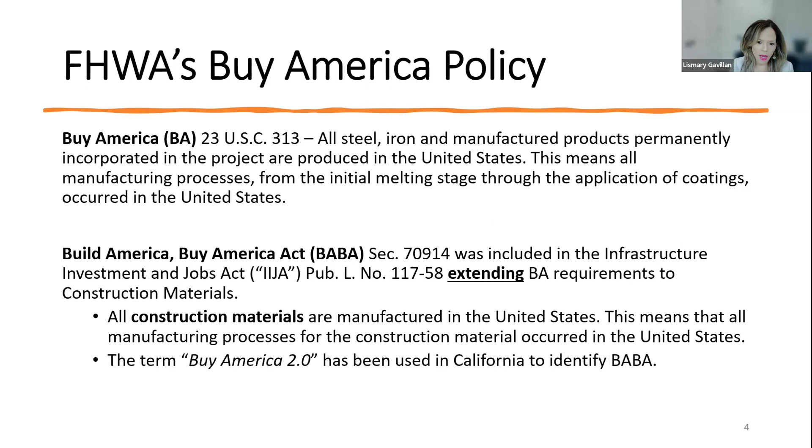Our Buy America policy applies to two types of projects. The first is any project that is federally funded, or any phase of that project that is federally funded. The second is a non-federal aid funded project if the non-federal aid contract is included within the scope of the NEPA document, and at least one of the other contracts within the scope of that same NEPA document, your environmental document, is funded or will be funded with federal aid funds. This includes any contracts eligible for federal aid assistance, including environmental, design, right-of-way, construction, or any other contract under that environmental document.

Now, these Buy America requirements on non-federally funded projects were implemented under MAP-21 back in 2012. So this is something that has been out there for a little while now, but it's always good to remember that this type of project, if these characteristics are met, is also subject to Buy America requirements.

So in summary, our current Buy America policy applies to steel, iron, and manufactured products with content of steel and iron higher than 90% by weight. You can find additional information about manufactured products in our general applicability waiver on manufactured products, issued in 1983, and also Caltrans Deputy Directive 119 for additional information on manufactured products.

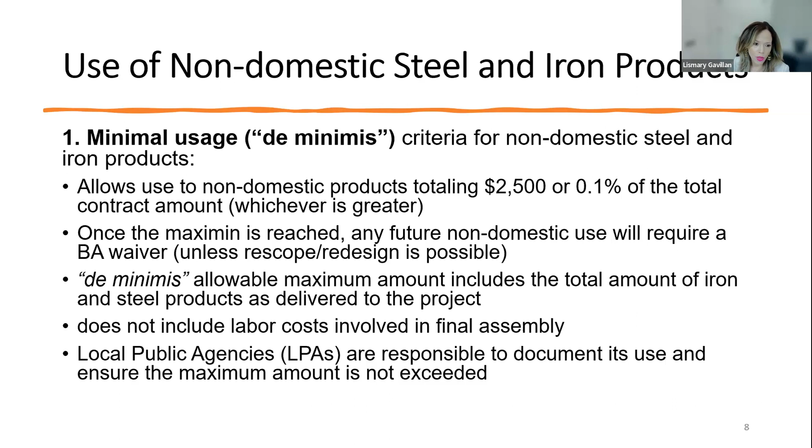For the minimal usage option, this allows for the use of non-domestic products totaling the greater of $2,500 or 0.1% of the total contract amount. Once this minimal usage is reached, any future non-domestic use will require a Buy America waiver, if rescoping or redesign cannot be achieved. The agency, the LPAs, are responsible to document the minimal use numbers and quantities and ensure that the maximum is not exceeded at any point during the contract.

Under option number 2, alternate bids provision, agencies have the option to include alternate bids for domestic and non-domestic steel and iron materials. This means the agency will develop two sets of plans, specifications, and estimate packages for the domestic and non-domestic project. This occurs during the design and advertisement phases, which we have to keep in mind, because sometimes people think we can use this once the project is already under construction.

Well, unfortunately, that's not the case, because for this option, the contract provisions when bidding the project must include and require that all bidders submit a bid based on furnishing domestic steel and iron materials. They also have to clearly state that the contract will be awarded to the bidder who submits the lowest total bid based on providing domestic steel and iron materials.

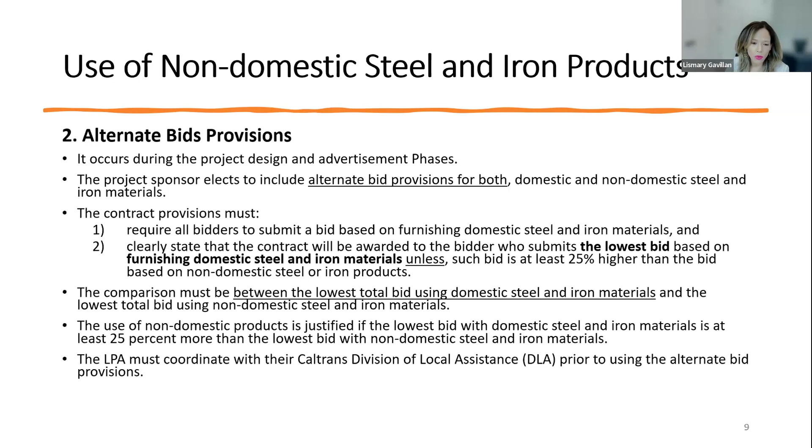That's unless such domestic total bid is at least 25% higher than the total bid based on non-domestic steel or iron products. When bidders submit their bids, they have to submit a bid based on domestic products, with the option to submit one based on the non-domestic bid. As the process determines, this provision can only be used during the project design, advertisement, and bid phase.

Now, the last option to incorporate non-domestic products is obtaining a Buy America waiver. This currently applies to steel, iron, and construction materials, as I mentioned a few slides back. This process is based on public interest, and whether there is sufficient supply of domestic materials of satisfactory quality. This is a very lengthy process, which requires years to process, and there is no certainty that at the end of the waiver review process it will be approved. We seldom, very rarely, approve Buy America waivers. That's very important to keep in mind.

Now, these waivers, any Buy America waivers, must be approved prior to the advertisement of bids. And if a Buy America waiver need is discovered during construction, then the waiver must be approved prior to incorporating the material into the project.

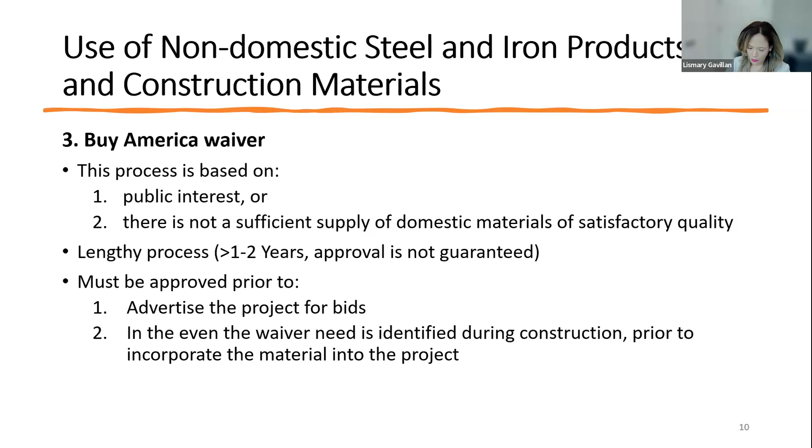Now, at the division level, we are responsible for the review of the waiver request for completeness. Once the package is ready, we would recommend it to our headquarters Office of Infrastructure for further review, and they will continue the coordination internally. We also work with Caltrans Division of Local Assistance to coordinate any additional information that may be required for the agency to complete the package, or any follow-ups from our offices in headquarters or the Made in America office.

Now, as you may have heard, there have been changes in our Buy America policy, and they were triggered by the Build America, Buy America Act, and that's what we're going to be discussing now. So how did we get here? How was this incorporated into our policy? Well, in January 2021, President Biden signed Executive Order 14005 on ensuring the future is made in all of America by all of America's workers, where it required federal agencies to maximize the use of domestic goods, materials, and products.

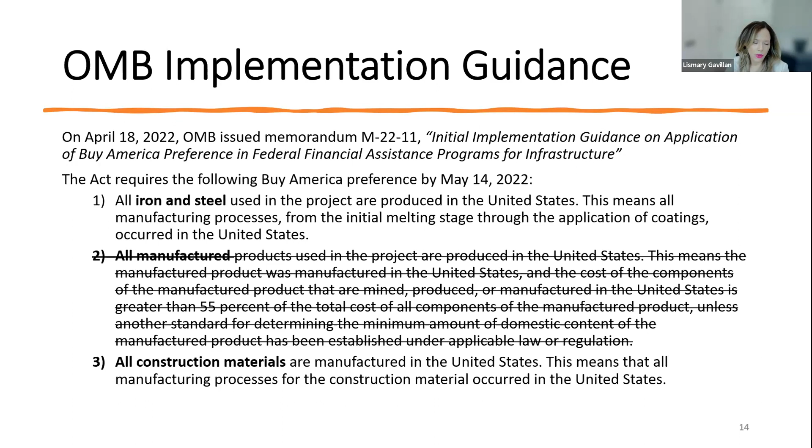So all our current policies on steel and iron remain valid. Nothing changed in that regard. Our manufactured product requirements will not change based on this memo, meaning that our 1983 manufactured product waiver is still valid, and I'm going to be discussing its review later on in the presentation. And again, the only impact will be adding construction materials to those materials subject to Buy America.

Now, the OMB memo is applicable to Federal Highways since IIJA defined infrastructure as roads, highway, bridges, public transportation, utilities, broadband infrastructure. And IIJA also stated that structures, facilities, and equipment that generate, transport, and distribute energy, including those for electric vehicle charging, should be treated as infrastructure. So that's the reason why this is applicable to our federal aid projects.

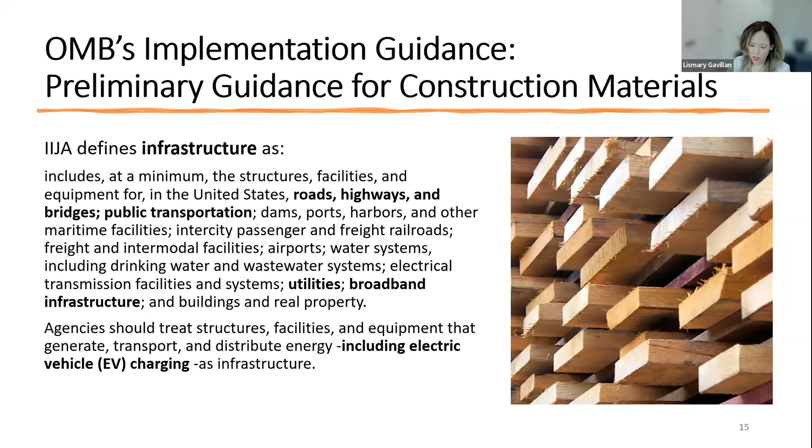Now, that same memo listed the construction materials subject to Buy America requirements as an article, material, or supply that is or consists primarily of non-ferrous metals, plastic and polymer-based products, glass, lumber, or drywall. I have to note that these are the only items listed here as construction materials. Items such as iron or steel, manufactured products, cement, cementitious materials, aggregates such as stone, sand, gravel, aggregate binding agents or additive are not considered construction materials. So we're just talking about this listing of 5 items here.

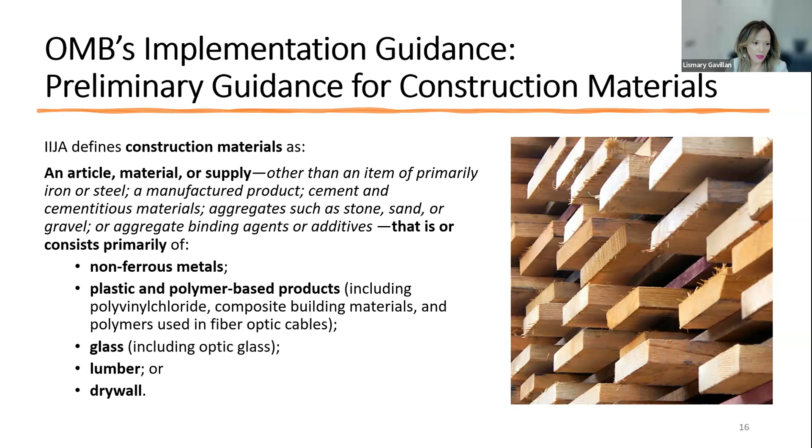Now, to facilitate the categorization of articles, materials, or supplies, OMB determined that such materials should only fall in one category: steel or iron, manufactured products, or a construction material. So to clarify, the memo states that items that consist of 2 or more of those listed materials combined through a manufacturing process are considered a manufactured product. And items that include one of the listed construction materials combined with another material not listed is also considered a manufactured product.

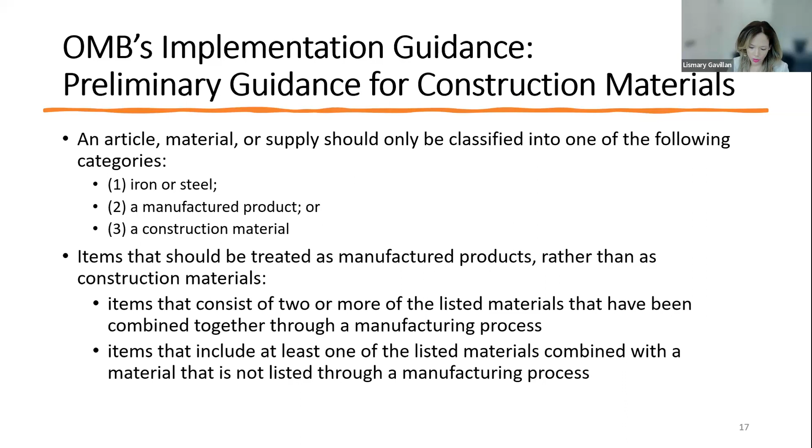Now, we're still waiting on final standards and definition for all manufacturing processes for those listed construction materials. So in the meantime, the OMB memo suggested agencies consider all manufacturing processes for construction materials to include at least the final manufacturing process and the immediately preceding manufacturing stage for the construction material.

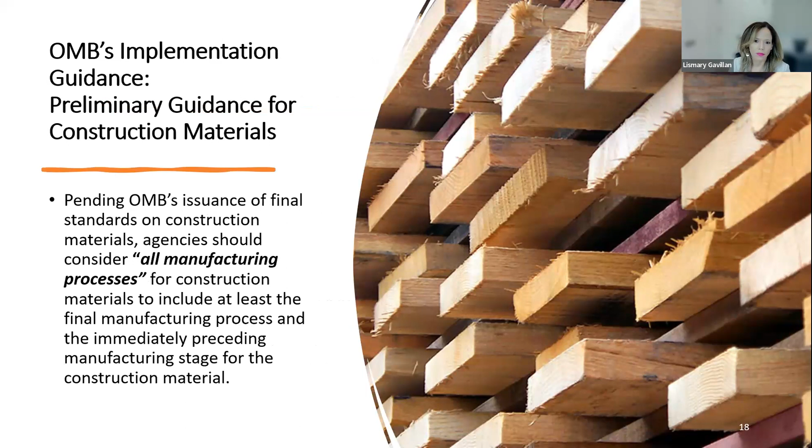The first one was a temporary Buy America waiver for construction materials. This was effective on May 14th, 2022, and it expired on November 10, 2022.

The second one is a waiver on Buy America requirements on construction materials for certain contracts and solicitations. This one was issued on January 30th, 2023, so it's a recent waiver.

The third one is a waiver of Buy America requirement for electric vehicle chargers, issued on February 21, 2023.

And the last one is a notice of proposed waiver of Buy America requirements for de minimis cost, small grants, and minor components. This one has not been issued, is still under review.

So the first waiver that I mentioned was issued in May 2022. This was a temporary Buy America waiver on construction materials. It was made effective on May 14th, 2022, as I mentioned. This waiver had a duration of 180 days, and it expired on November 10th, 2022, since it was not extended.

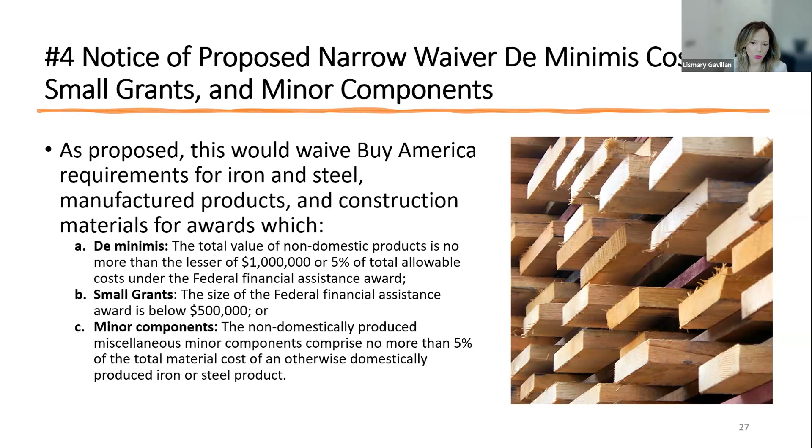We also have the raw materials waiver, ferry boats, and concrete pole waivers. All of these are older than 5 or 6 years now, so all need to be reviewed. Our headquarters is prioritizing the most popular waivers for federal highways, which are the manufactured products and raw materials waivers. The other two, ferry boats and concrete pole, won't affect our federal aid program, so we don't have to worry about those for now.

So now we continue implementing all the general applicability waivers. Our manufactured products waiver from 1983 is still valid. Our raw materials waiver is still valid. We'll have to wait until the review period is finalized and then made effective. Any changes made effective, that's when we'll look into what the changes are.

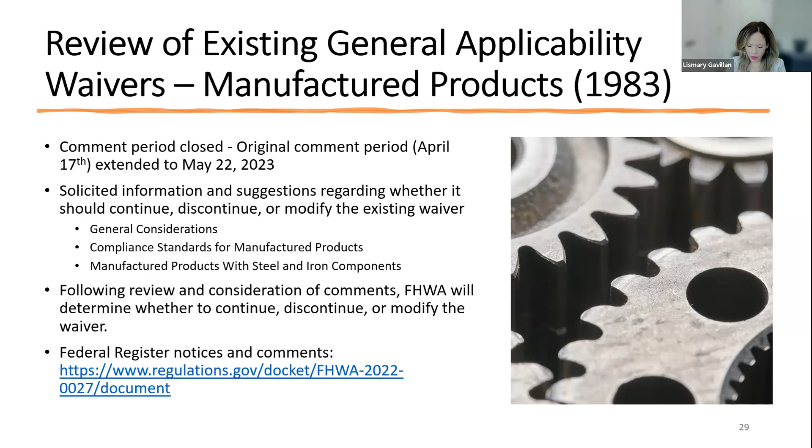In addition to the waivers effort, there is a proposed rulemaking for guidance for grants and agreements. OMB, the Office of Management and Budget, is proposing a new Part 184 in 2 CFR, Code of Federal Regulations, Chapter 1, to support implementation of the Act and clarify the requirements within 2 CFR 200. These proposed revisions are intended to improve uniformity and consistency in the implementation of BABA requirements across the government. The comment period closed on March 13, 2023, and is currently under review by OMB.

Moving forward, USDOT will issue a final determination on the proposed de minimis waiver I just mentioned. Please note again that any proposed waiver is not final until issued and made effective. We also continue the review of the general applicability waiver on manufactured products, which is ongoing, and we expect the raw materials waiver to be the next one put into the review process. We're still waiting on OMB's issuance of final guidance for construction materials, but in the meantime we do have preliminary guidance we can use to implement BABA. At the division level, we continue to provide technical assistance to Caltrans and local agencies as it relates to Buy America.

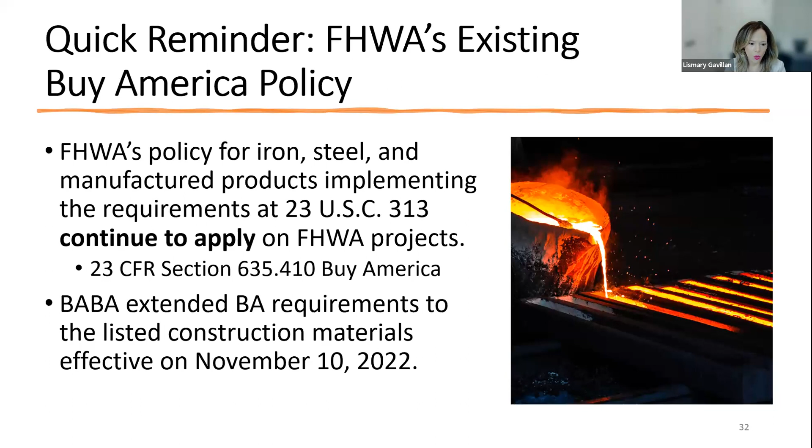Number two: do federal highways existing Buy America requirements for steel, iron items, and manufactured products continue to apply? Yes. BABA just extended the application of Buy America requirements to a new category of products, construction materials, those that we listed earlier in the presentation.

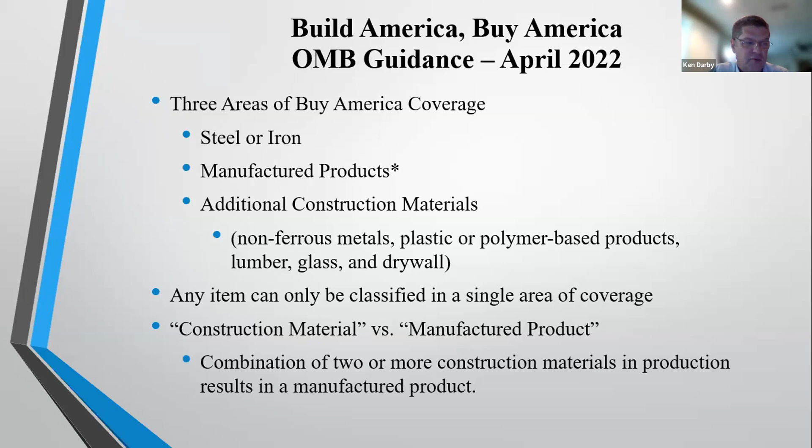Then these temporary elements that are not incorporated into the permanent work, we talked about formwork or false work. Again, as long as it's not incorporated into the permanent work. Another example might be a temporary culvert that's used on the project and then later removed.

Existing items that are relocated from one location to another on the project, so a manhole, for instance, or maybe another culvert. So as long as you're just taking that material and relocating it, it's not subject to Buy America. Now, if you get out there and you find that it's reached the end of its service life and needs to be replaced, then it is going to be subject to Buy America coverage.

This next one is really for the additional construction materials only. The raw materials, surface treatments, and coatings have not been well defined like we have well-defined requirements for steel and iron in this regard. So for now, at least, until we get more distinct information from OMB and other federal agencies and departments, we're not requiring that those raw materials, surface treatments, and coatings be subject to Buy America.

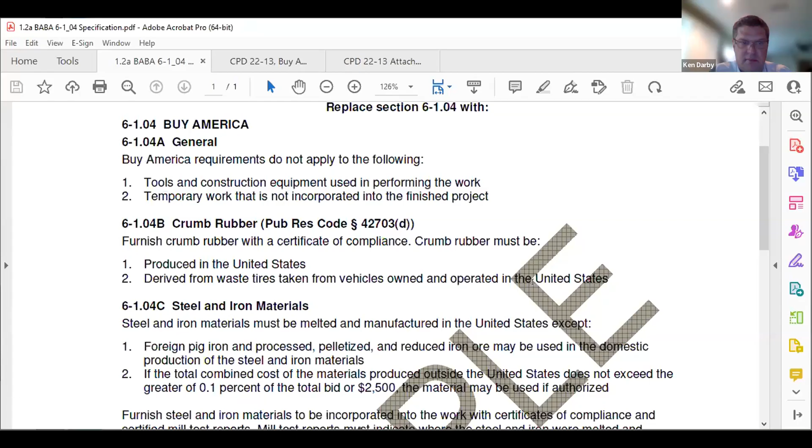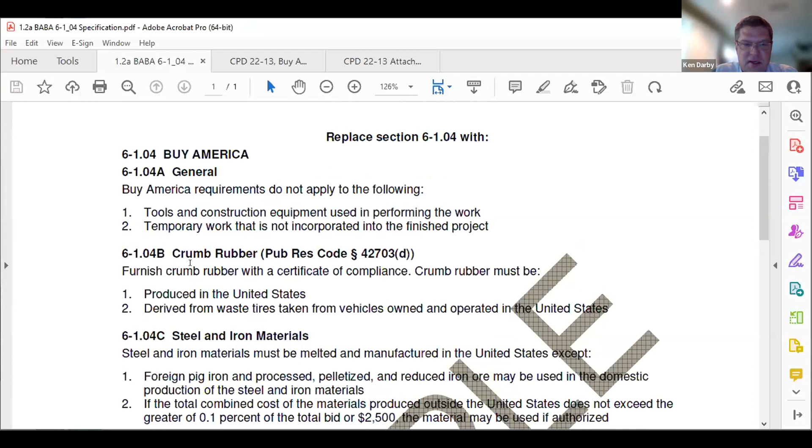Okay, so this is going to look very familiar to what we've discussed already. The general section is really identifying those exclusions, the tools and construction equipment, the temporary work. The next section here is the crumb rubber, which is a state mandated Buy America requirement, and that's really specific to Caltrans.

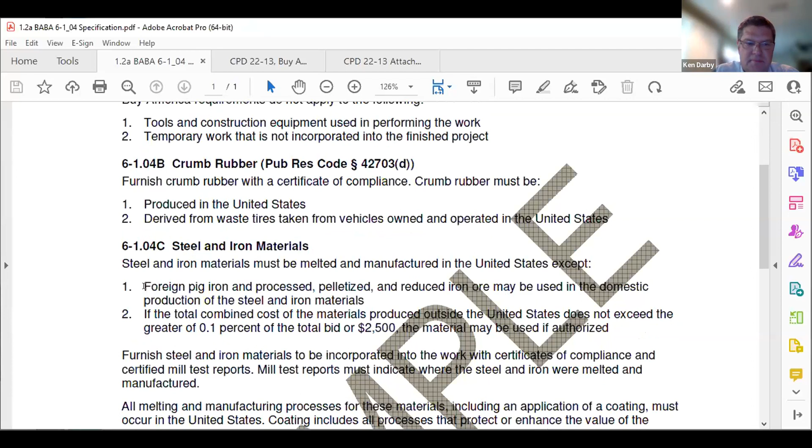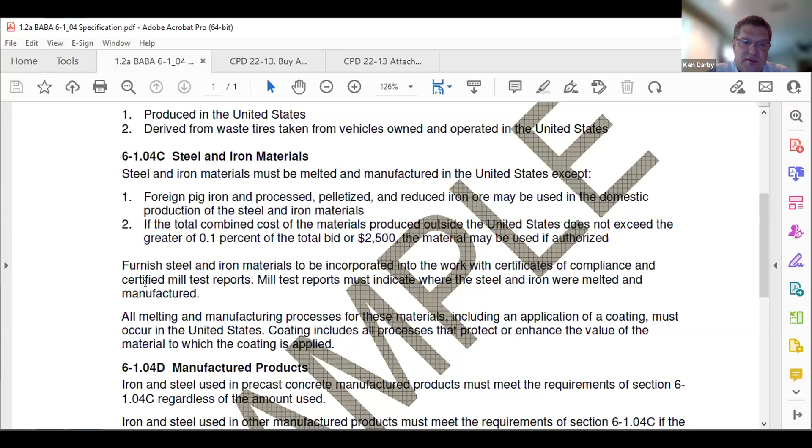Then we have the steel and iron material requirement, which is essentially unchanged. We still have the allowance for the non-domestic raw iron and steel materials. And then we also have the minimum use allowance, which is the greater of 0.1% or $2,500. And again, that is only for steel and iron materials. We don't have a similar minimum use allowance for the additional construction materials that we'll see later.

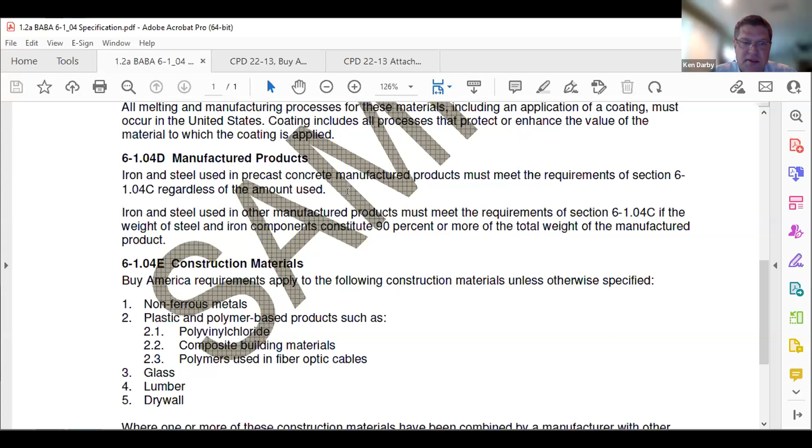The manufactured product section—again, we're only concerned with those manufactured products containing steel and iron. This is directly in line with what we have in Deputy Directive 119. So for precast concrete manufactured products, if there's any steel or iron in them, they are subject to Buy America, the steel and iron. Otherwise, we have this 90% by weight of the manufactured product—if your steel or iron comprises 90% or more by weight of the total manufactured product, then that steel and iron aspect is subject to Buy America.

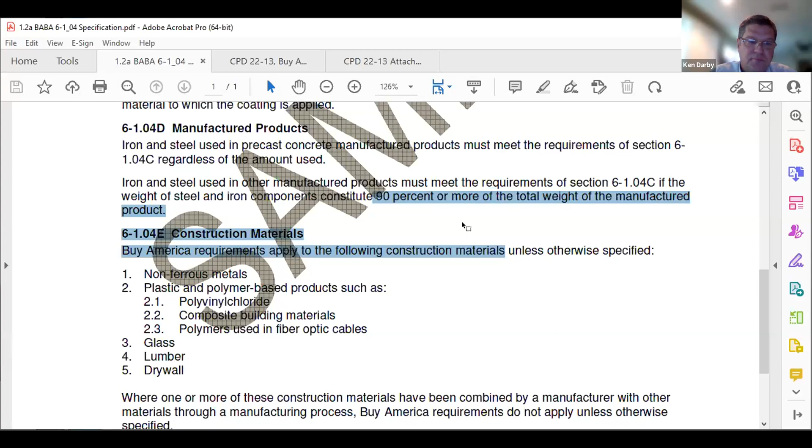Okay, then the spec goes into construction materials. It identifies the non-ferrous metals, the plastic and polymer-based products, glass, lumber, and drywall. It also discusses where, if you combine one or more of these materials in the manufacturing process with another construction material, it's not subject to Buy America unless otherwise specified. The otherwise specified is, if you combine it with the steel or iron, you're going to fall back into that case above potentially.

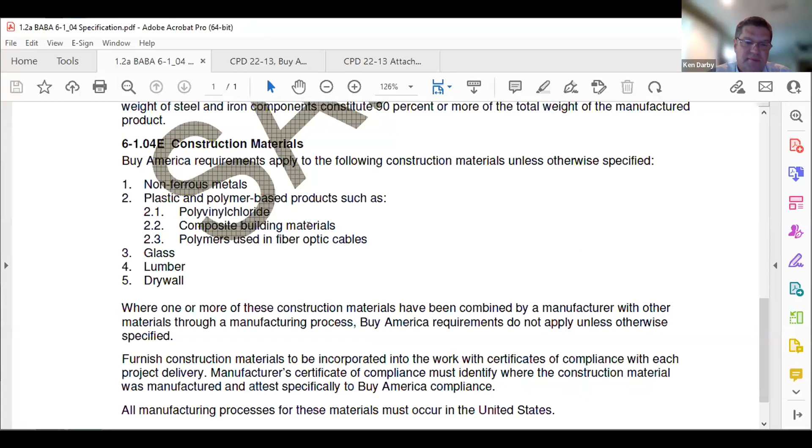The other important aspect I want to stress here is what we're doing initially as far as validating Buy America for these additional construction materials is requiring the certificate of compliance from the manufacturer or producer. Those need to be provided with each delivery of these types of materials to the project. It's important to note that we only accept those from the manufacturer or producer—we don't accept those from a contractor or a supplier. So this is really kind of a big change for our contractors out there.

Okay, now I'm going to go to, let's see if I can just—I'm going back to the PowerPoint real quickly.

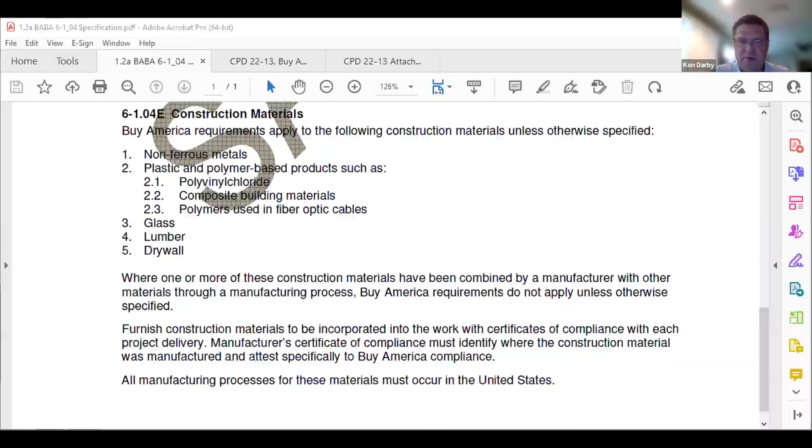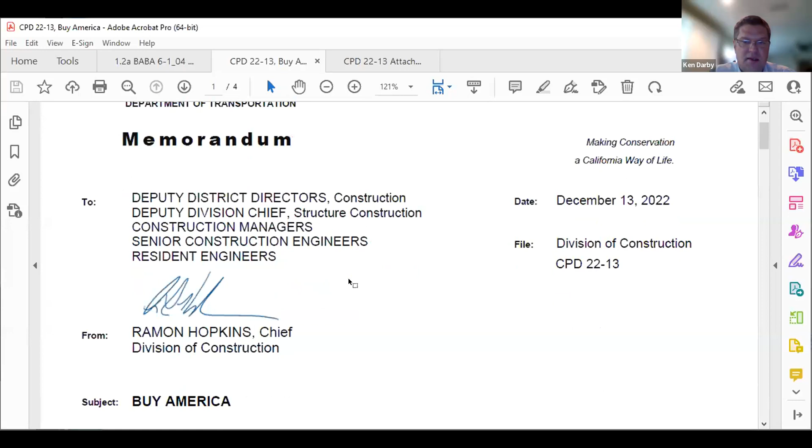This came out in December 2022, and it's got a lot of the same information we've been discussing. I'm just going to highlight a couple additional items that you may want to be aware of.

We encourage our people to discuss the new Buy America requirements at the pre-construction conference, have a Buy America topic there. We're also trying to make sure that our contractors are using form CEM-3101, the notice of materials to be used.

That identifies where a material or product is being manufactured or produced from. It also allows the department to arrange for inspection services, but really it has a lot of good purposes and helps to avoid potential pitfalls.

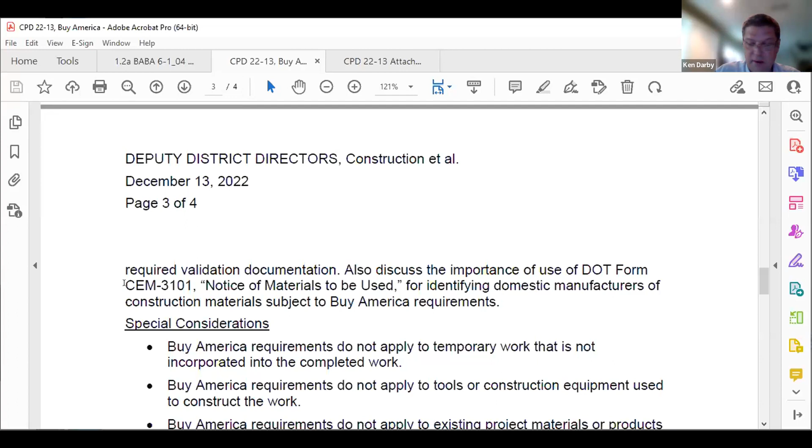It also talks about certificate of compliance requirements in section 6-203C of our standard specs. It stresses again that that minimal use allowance is only applicable to steel and iron materials, not these additional construction materials. It talks about these authorized material lists where there may be...

It may differentiate items by domestic or non-domestic sources. And it's really incumbent on the contractor to select the appropriate source based on that contract's allowances.

We also talked about the potential for material shortages due to these new Buy America requirements and how that should be administered. We also talk about change orders to implement alternative materials or alternative designs as workaround solutions to the Buy America requirements. Again, Liz Marie covered that very well.

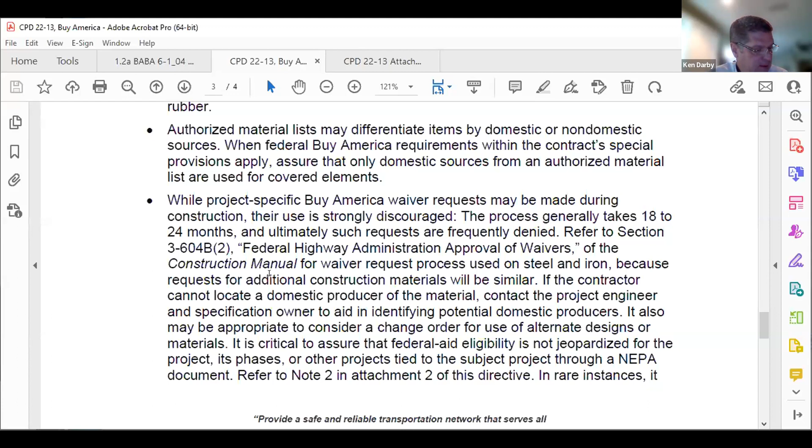So the other thing the CPD has is an attachment entitled Frequently Asked Questions. And I won't go into a lot of detail as far as its review, but it does have some very good information in there. It gets down into some of the specifics of, for instance, what lumber is.

You know, there's not a real great definition of what lumber is. So here's what we have said: it applies to solid wood boards, planks, and posts. Right now, the engineered wood products such as plywood, oriented strand board, and glue laminated timber beams are not considered lumber. Neither are timber poles. So that kind of detail is placed in here.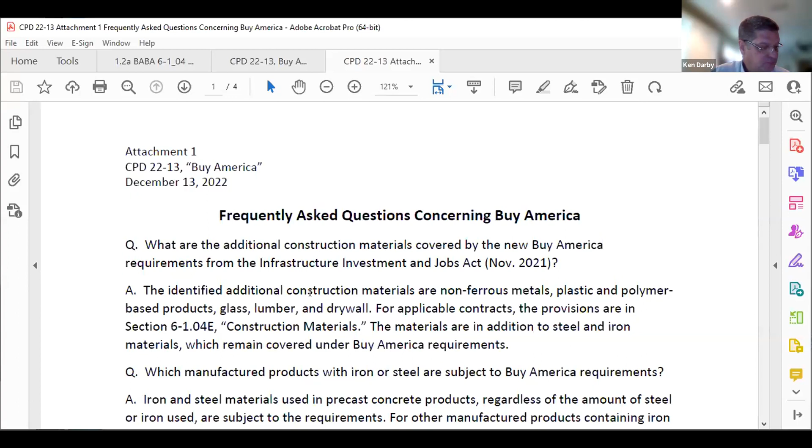We've also placed this document on our contractor's corner, which is on our office engineer site, there for bidders' consideration. So it gives them more detail on how we've interpreted the Buy America requirements. I think the important thing... yeah, you should also have access to this document.

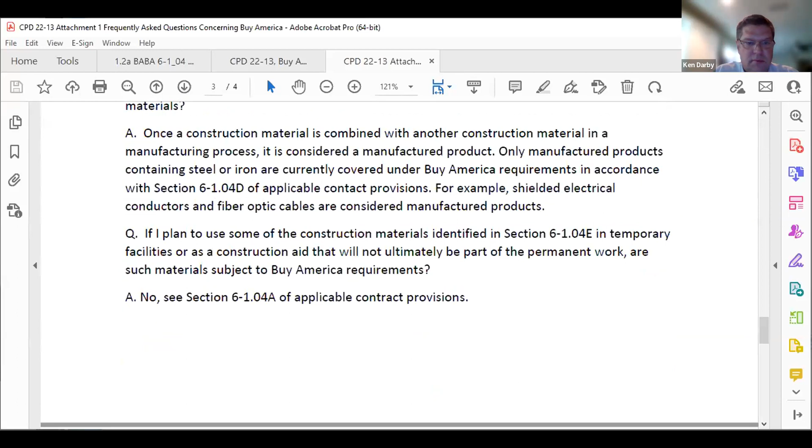Now I'm going to go back to PowerPoint. Sorry about that. So I did want to mention, and I think Liz Marie covered this as well, very well...

Just keep in mind, there's a high likelihood of further Buy America changes. I try to stay away from using Buy America 2.0, but really, I think in some respects, that's a really good indication that, yes, there are going to be additional changes coming forward.

We know that in November, there was the proposed de minimis allowance that USDOT placed on the Federal Register. Again, that hasn't been finalized, but that does potentially have some additional allowance for non-domestic use.

We know that OMB proposed revised guidance back in February 2023. Some of that information proposed at that time would expand those additional construction materials.

There was also recently the reconsideration of the 1983 FHWA manufactured product waiver that was originally posted in February 2023. That could be huge if it's significantly revised or eliminated in its entirety. There's been I think over 8,000 comments on that particular one, which is the largest number I've seen on any Buy America item to date.

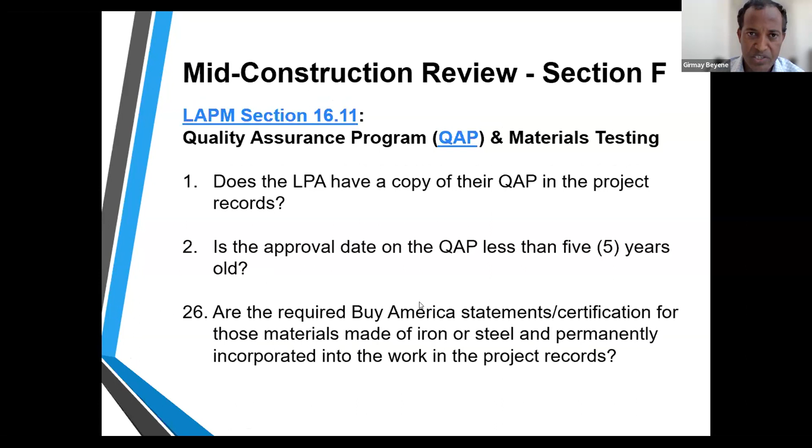Caltrans Buy America efforts - as Ken mentioned, Caltrans has a Buy America implementation team, the BAT team, formed to help implement guidance on Buy America and develop specs. The Division of Local Assistance is part of the BAT team, so we attend meetings and share information, taking it from the BAT team and conveying it to local agencies through our office bulletins or daily blogs. On the capital side, as Ken mentioned, they develop short and long-term acceptance processes, the standard special provisions, and actively work with the specification owners to identify any potential issues.

On the local assistance side, on our side, Division of Local Assistance, we update LAPM manuals, specifically Chapter 12 (Plans, Specifications, and Estimates) and Chapter 16 (Administer Construction Contracts). Any change in guidance or policy updates, we accordingly update Chapter 12 and 16 of the LAPM, and Exhibit 12G, required federal aid contract language. Section 8 of 12G covers Buy America, so we updated that and will continue to update it.